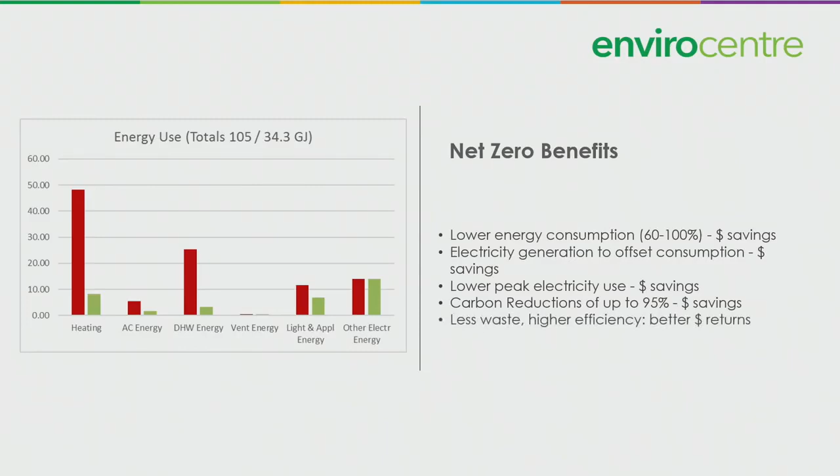Moving on to more net zero energy benefits. So when we have no combustion, we have safer businesses. We have lower insurance—this is something that you can take advantage of. You have better workplace comfort.

Employee satisfaction goes up, and you have marketing advantages, such as those being taken advantage of by some businesses like IKEA or Mountain Equipment Co-op.

Here's a net zero example. It's a retrofit done on a 1980s row house, though you could expect comparable results with many small businesses. The upgrades included replacing a mid-efficiency gas furnace with an air source heat pump and electric furnace. The standard gas water heater was upgraded to a heat pump water heater with drain water heat recovery. Air leakage was reduced significantly, down to 1.5 air changes per hour. Lighting and appliance upgrades were applied, all windows were replaced with triple pane fiberglass, and 500 square feet of solar panels were installed to match the reduced usage.

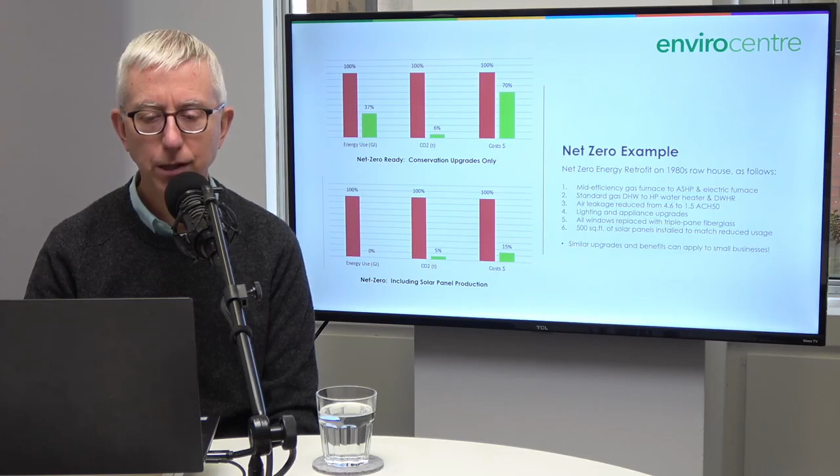Now, when we install the solar panels, what happens? Our energy use has gone down to zero — that's the net zero we've been talking about. Our CO2 has gone down by 1% more, and look at our costs — they've gone down to only 15% of the original. The reason you're paying anything at all is because you have to pay to keep the account open. That's merely your fixed cost, because all the rest of the electricity is being accounted for by the production of your solar panels in the net metering situation.

Note that this particular scenario does not include so-called deep retrofits. The building was not clad with insulation or anything like that, and it has a payback period of less than 10 years. So the economics are there to support going towards net zero.

Now, how are we going to get towards net zero? We'll try to give you some ideas of where to start. First, you're going to lower your heating and cooling demand so you can get away with smaller equipment and lower energy use, less combustion of fossil fuels, and a clean local electricity supply.

We'll look at some ways of getting there. First, the price of deep retrofits. I'm a little skeptical about the approach of using deep retrofits to get to net zero. The reason is that they are costly and there are diminishing returns.

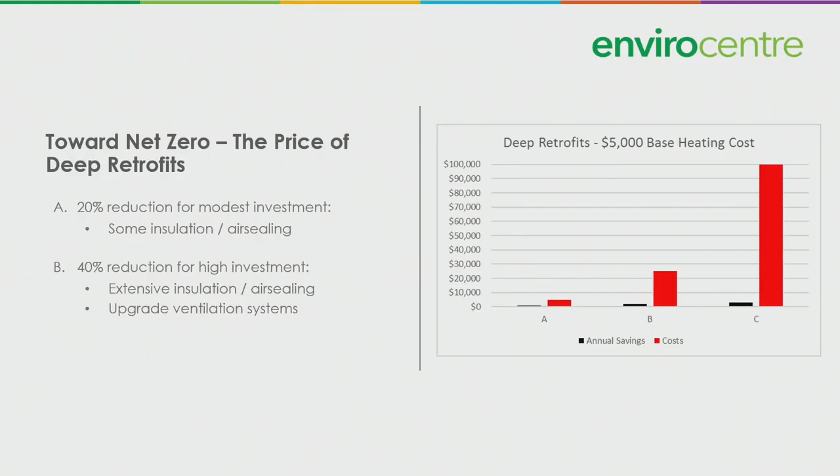In the third scenario, we're getting a 60% reduction, but our investment is very high — it's going to cost us $100,000, which is typically what these kinds of retrofits cost these days. For that, you get full exterior insulation and air barrier, the full foundation insulated to a high level, and all windows and doors upgraded. But you're still only going to get a 60% reduction of your utility bills. So you're spending $100,000 to get $3,000 a year. The economics don't look so good for deep retrofits.

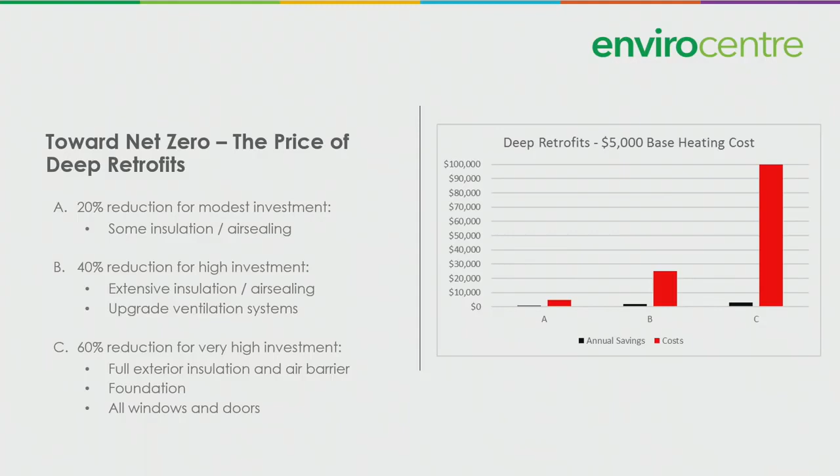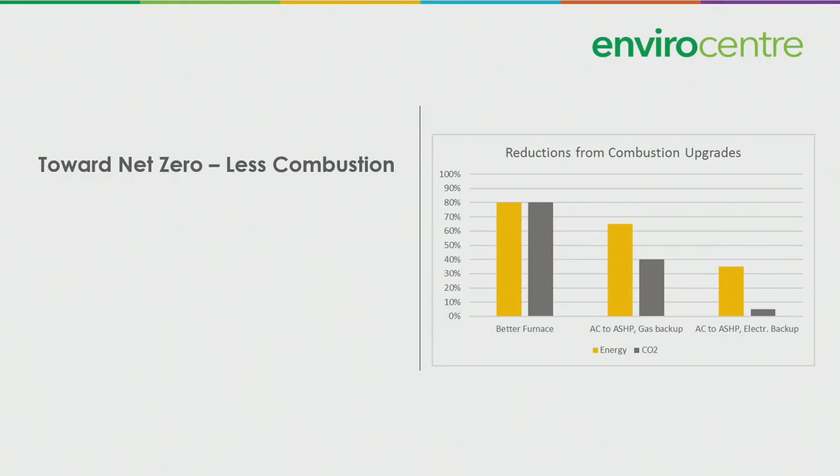What I'd like to encourage instead, as a starting approach anyway, is to aim for less combustion right off the bat. In this table, we're comparing the energy use and carbon production for various upgrades. First, the initial scenario: we took our old furnace and put in a more efficient furnace, and as a result reduced our usage by about 20%, from 100% down to 80%. The incremental cost for that kind of upgrade is fairly small.

However, if we had instead decided to take out our old AC and put in an operational air source heat pump, we would get much deeper gains. So we're cutting our energy use by 45%, and we've got a 60% drop in our CO2 for taking that route.

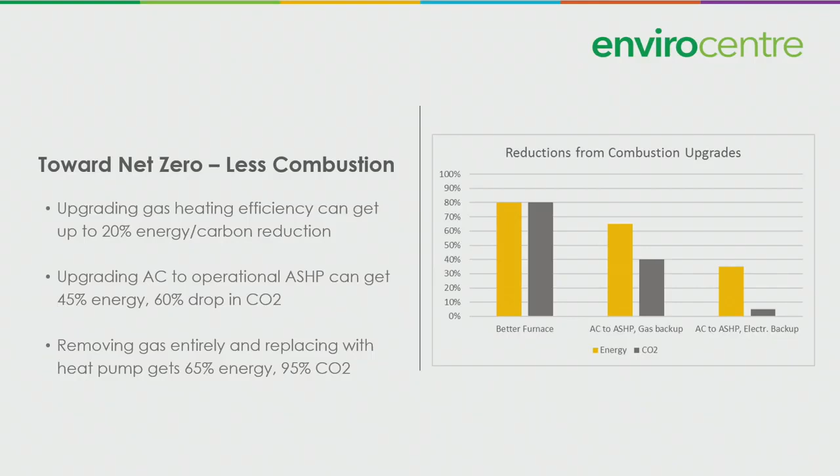Bear in mind that we're still keeping the original furnace in this case, still there as a gas backup. In the third scenario here, we remove the gas entirely and replace it with a heat pump with electric backup, and that gets you a 65% reduction in energy and a 95% reduction in your CO2. So these are much more economical and feasible upgrades than doing the envelope upgrades, which take a lot of planning, time, and materials, and take time to install as well.

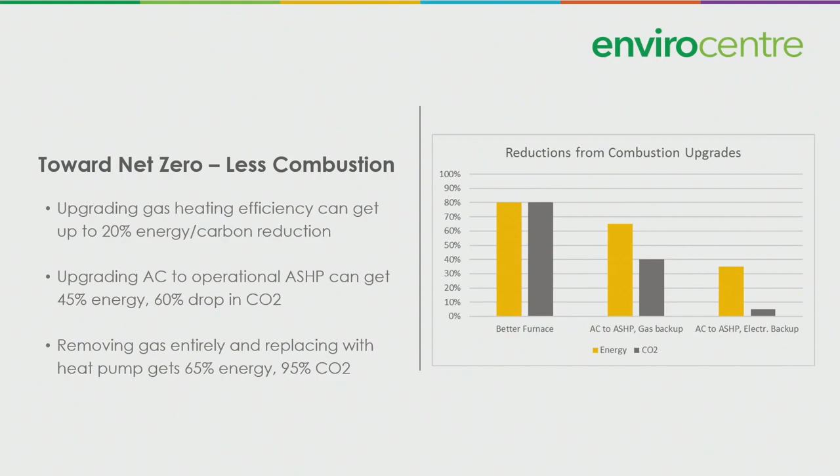Going towards looking at our clean electricity grid. Our current electricity grid here in Ontario is pretty clean. We actually have a pretty low emissions factor now because we've gotten off coal here in Ontario.

The question is, can our grid handle the extra load? If we're going to shift everything off of producing heat directly with natural gas and start producing it with electricity, are we going to be able to handle that?

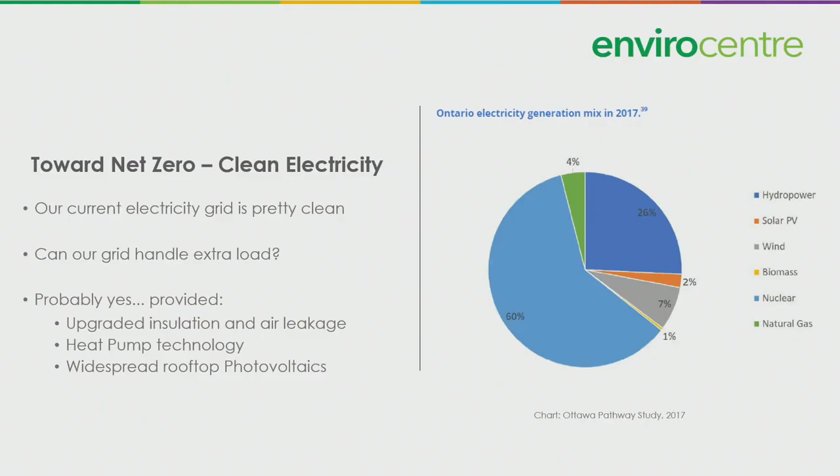Probably yes, I would say, provided that we also upgrade insulation and air leakage in our buildings, adopt heat pump technology, and install photovoltaics on a widespread scale on rooftops. There's a lot of flat roofs out there that have nothing on them but HVAC equipment.

Here's an upgrade awareness activity. What do you think would be the most effective retrofit projects when you consider energy savings, cost savings, and carbon savings? Which of those would deliver the highest percentage? The 5 scenarios are: upgrading all lighting in an office tower to LED, installing a heat pump instead of an air conditioner in a business. Mind you, we're talking about percentages rather than absolute values here, so the size of the business isn't as important.

Installing R60 insulation in an attic that previously only had R30 insulation. Upgrading an uninsulated basement to R10, or installing triple pane windows.

So if we look at these different scenarios, the best one for energy savings turns out to be the heat pump, with the worst being the attic. The reason being that the attic is typically the best insulated part of the building. For example, when you're outside walking around with a thin coat and a warm hat on, you don't put on a warmer hat to be more comfortable. So the lesson there is that it has very little effect insulating the best insulated part of the house.

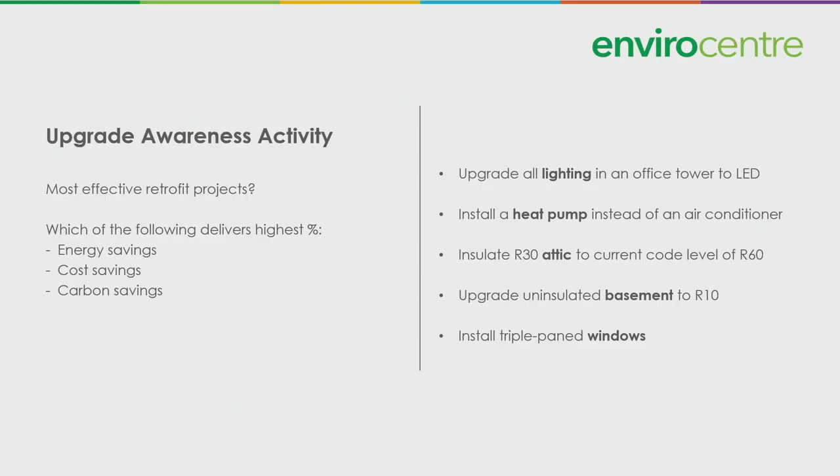Now, if we look at carbon, the best is again the air source heat pump, and the worst is lighting. The reason being that inefficient lighting produces lots of heat. When you replace it with efficient lighting, you now have to turn up your heating equipment to make up for the difference, and if your heating equipment is fired with natural gas, then your carbon is going to go up.

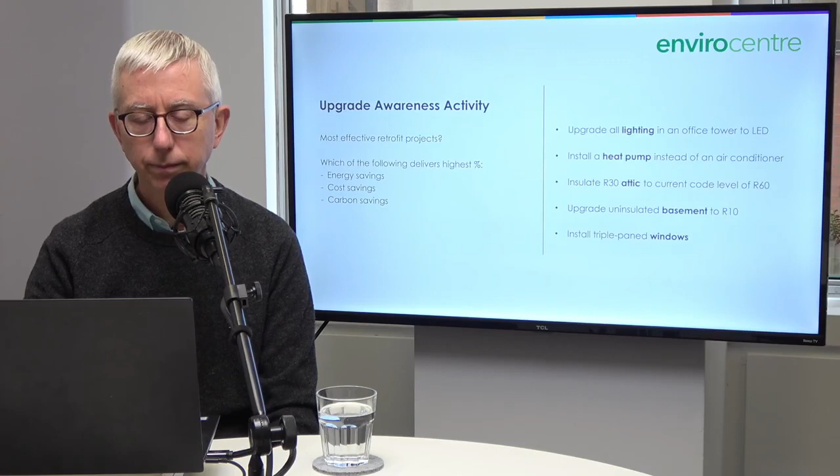So first of all, you would want to find out where you are and use benchmarking. It's more than just dollars - this is bookkeeping that allows you to make decisions based on the whole consumption picture.

It's do it yourself, or help is available through Energy Star Portfolio Manager, which is a free online tool. You can also join Carbon 613 - we would certainly help you establish your baseline and targets, or you can have an energy audit.

If you're going to have an energy audit, you'll need to find an evaluator. For an office, retail, restaurant, or workshop situation, you would look for an energy auditor or an energy manager. Typically, they would be coming from a consulting engineer or a utility company, or some place like that that specializes in that kind of activity.

For rental properties, you could use a registered energy advisor if the building was reasonably small. It would need to be Part 9 building code, which means less than 600 meters squared footprint and 3 stories or less.

If you rent, lease, or share your building, you can influence your workplace. You can have a green team. You can reduce your energy use through behavior. You can do some small upgrades that have big impact. And you can still join Carbon 613 for ongoing support.

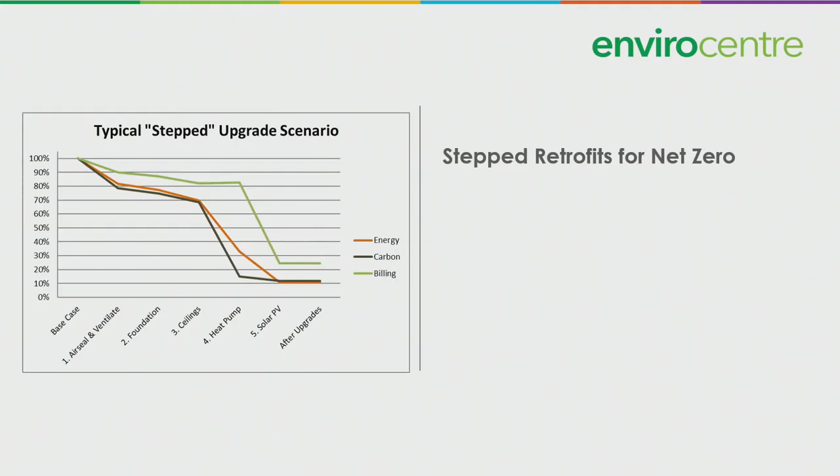Let's look at stepped retrofits for net zero. These stepped plans start with the most cost-effective upgrades and use savings to pay for other upgrades, and typically it's building envelope upgrades first. This is a particular scenario that was performed on a building downtown in Ottawa that's a heritage building, so the upgrade scenarios are somewhat limited by what you can do to the exterior of the building.

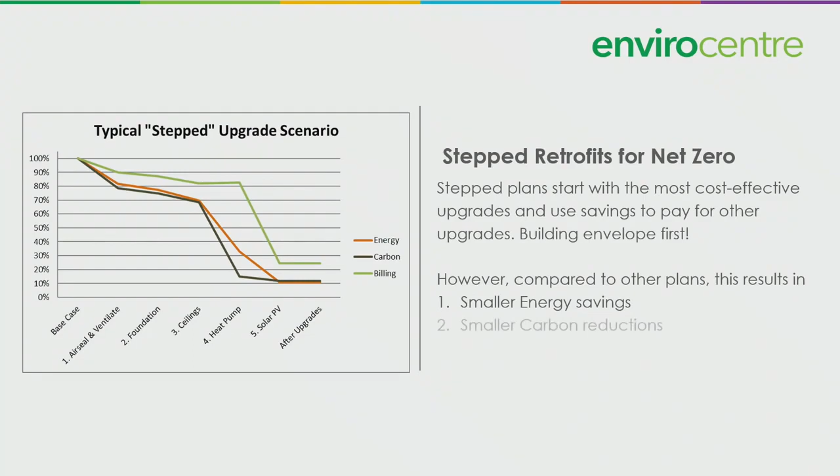However, when you compare the stepped retrofit scenario to other plans, this results in smaller energy savings, smaller carbon reductions, and smaller dollar savings. So I don't recommend it.

What I would recommend instead are more effective strategies for net zero, including this high impact greenhouse gas upgrade scenario. With that scenario, we cut to the chase. We start with upgrades that have immediate significant impact on energy use, like air source heat pumps and solar photovoltaic cells.

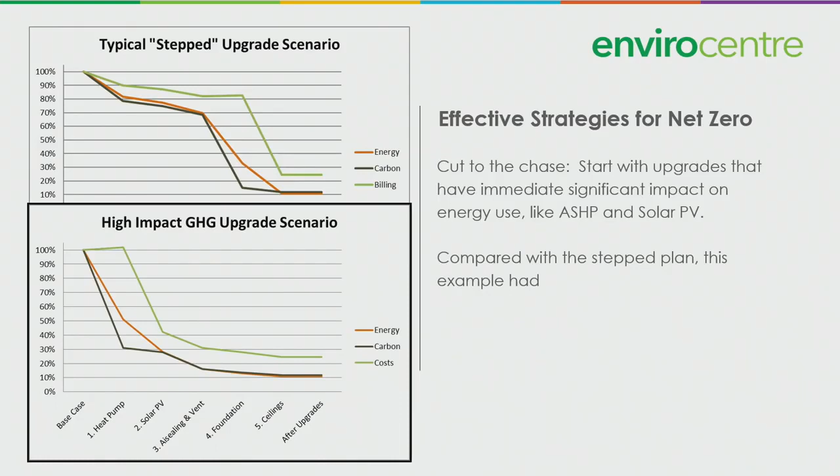Compared with the step plan over a period of 5 years, this example had 56% less energy use, which amounted to 740 gigajoules, 60% less carbon production, 33 tons, and 38% lower utility costs, which amounted to almost 10 grand in extra cash. So obviously it's a better route, especially when you consider that both of these upgrades cost exactly the same amount. The capital costs were the same.

You can kind of see, if you look at the two charts, why that is the case. The step scenario has a kind of belly that sticks up, and the amount of savings are represented by the amount of area that's underneath the curve. So the smaller the area there is, the greater your savings are going to be. And that's the case for every one of these curves with this kind of scenario.

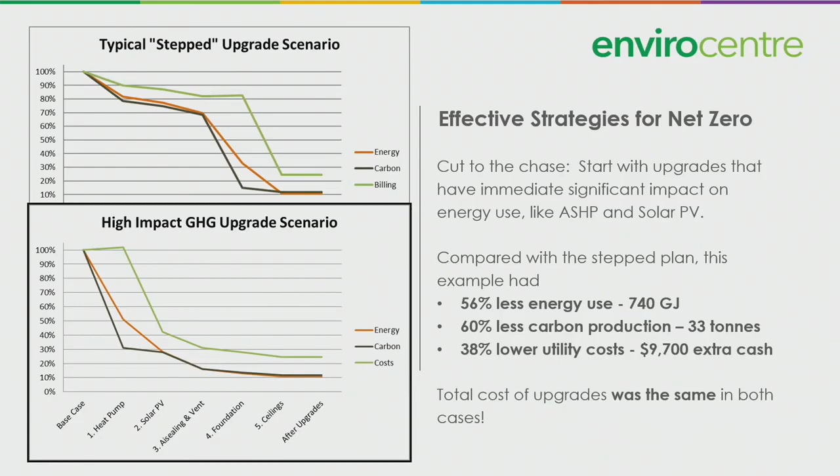So, high impact strategies: first of all, they require energy analysis. You need to get an energy advisor in earlier to get the projected sizing of equipment and the solar photovoltaic cells. You have to arrange financing to support the upgrades because you're going to have more upfront costs.

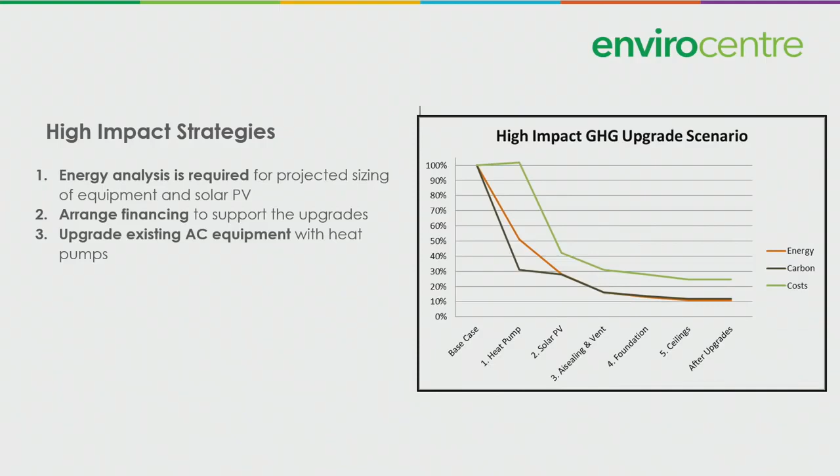Upgrade the existing AC equipment with heat pumps. That's what I would recommend starting with. Keep the existing heating as backup for now. You don't need to replace your furnace or your boiler yet. Install your solar panels.

Then perform your viable envelope upgrades in the most cost-effective order. Deep envelope upgrades may not be necessary to hit the target. If you look at the chart on the right, we reached 90% reduction of carbon and energy use.

And upgrade your ventilation systems with heat recovery. What happens when you're tightening up these buildings is they become more airtight, so it becomes more crucial to provide effective ventilation.

Finally, when you've done all the other upgrades and your combustion equipment is reaching the end of its life, retire your combustion equipment and replace it with something that produces heat through electricity.

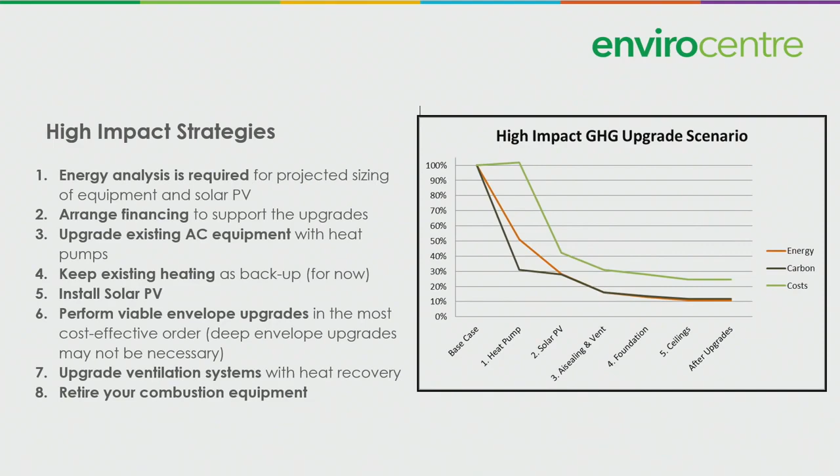So a little bit more about incentives here. Incentives cut your costs. We have the Hydro Ottawa IESO Save on Energy retrofit program, which offers substantial incentives for electrical savings and also certified energy manager training. We have Enbridge that offers Smart Savings, which is similar, and they also have some home efficiency rebates that we'll talk about.

So first of all, the Save on Energy program: don't start your upgrades until you submit the application. They won't accept it if you're kind of in midstream. You need to get in there before you start doing anything.

There's a prescriptive track for lighting upgrades, etc., so you get an incentive in dollars per unit of product, but you require an application and documentation. There's also a custom track for everything else that can't be done under a prescriptive track, so there you get paid an incentive per unit of demand or consumption, depending on your situation. That custom track will cover up to 50% of your project costs, which is potentially a very hefty rebate.

The application includes your info to estimate energy savings. It can also be submitted by a third party like Envirocentre.

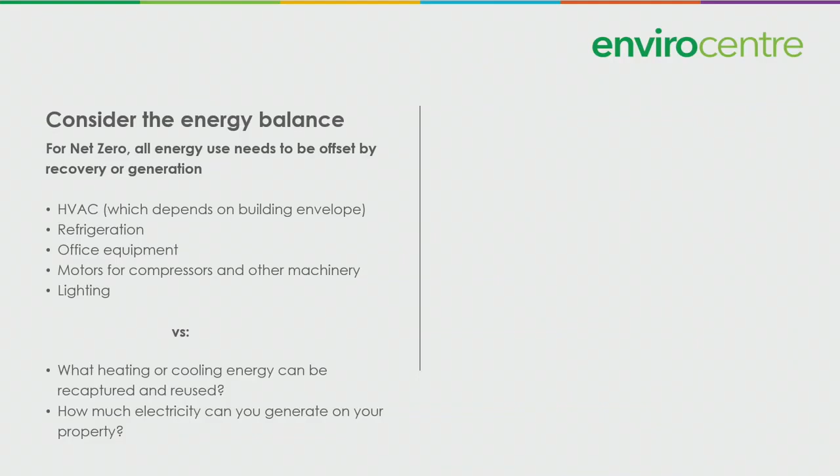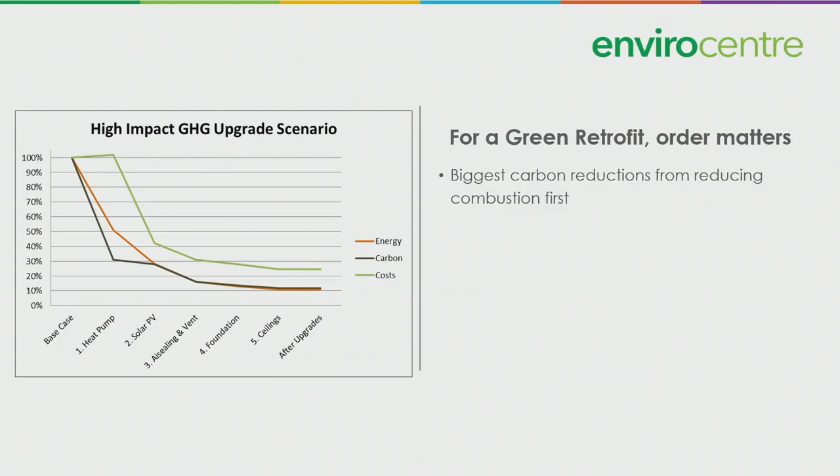For a green retrofit, order matters. Target the biggest carbon reductions first. Start by replacing your older central AC with heat pumps. The incremental cost is small and operating costs will be similar. Solar PV next, then do the cost-effective upgrades.

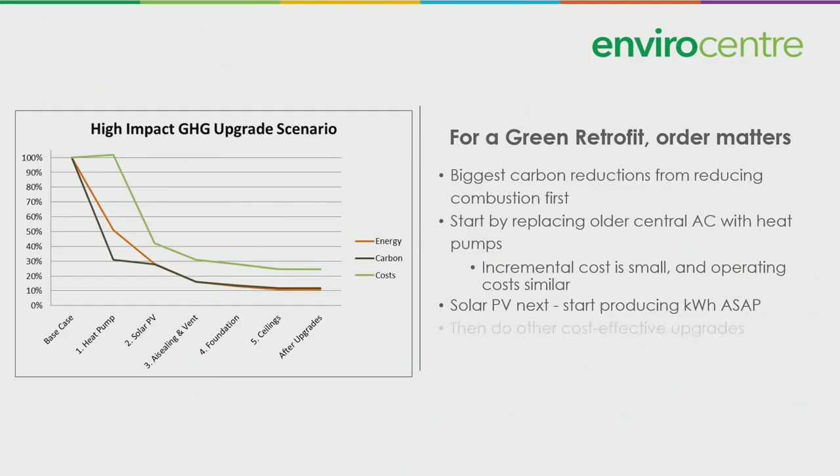So now we're going to talk about some of the upgrades. Some of this we've covered in part 1, so I'm just going to breeze through it here. The easy energy efficiency upgrades would include things that would reduce your heating bill by about 10%, such as poorly insulated attics, uncontrolled air leakage, idling or redundant equipment, exhaust fans with no heat recovery, older equipment that produces heat or cold. Deeper energy efficiency upgrades include poorly insulated walls.

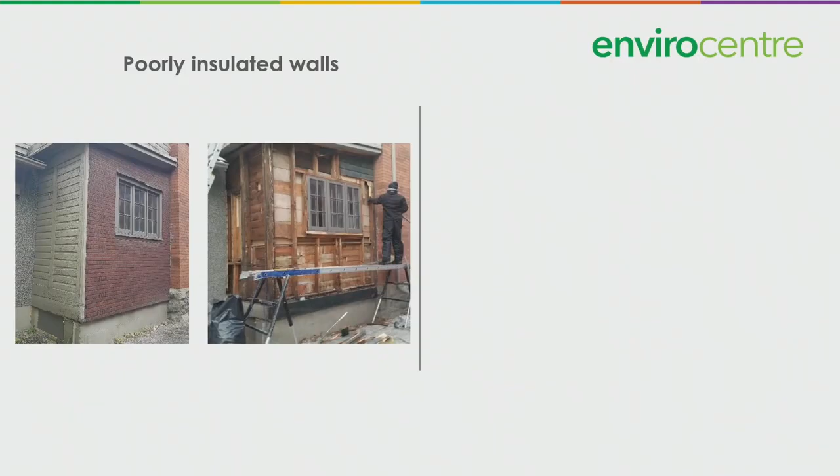If there are empty wall cavities, typically they're not opened up like the one in the picture here. They can drill small holes and implement a speedy, inexpensive upgrade that can save up to 20% on your heating bill. Cellulose is packed into the walls, and it also reduces your air leakage, so you get a lot of bang for your buck.

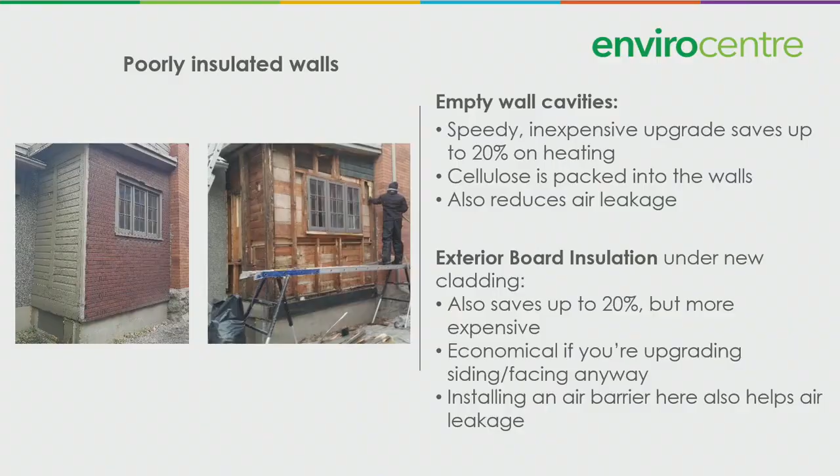You can also apply exterior board insulation under new cladding. If you were intending to put in new cladding, this would be a good approach to take. You could save up to 20% depending on the situation if you're starting with uninsulated walls. But it is more expensive to put in this board insulation. It can be economical if you're upgrading the siding or facing anyway, then it becomes more of an incremental cost. Installing an air barrier here also helps reduce your air leakage, so that can be a good approach.

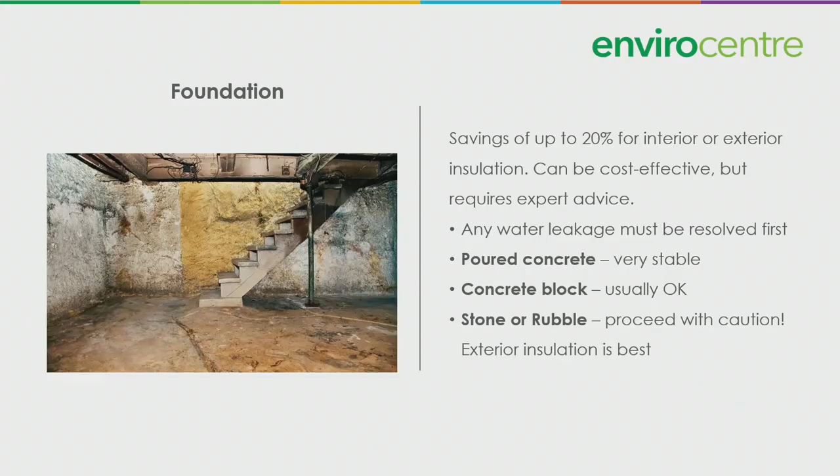On the foundation, we have savings of up to 20% for interior or exterior insulation, which can be cost effective, but it requires expert advice. The reason being, any water leakage must be resolved first. In fact, water is usually the prime concern here in some way. If you have a poured concrete foundation, it's very stable and you can insulate it from the inside, usually without too much concern if there are no water issues. If you have concrete block, it's also usually okay. But if you have stone or rubble, you have to proceed with caution. The exterior insulation is best. So get expert advice for foundations.

For windows, it's not usually cost effective for energy to install windows. You get less than 10% savings, but you get increased property values. They also help control sound and comfort. If you're going to install them, install the best you can afford, which would be fiberglass triple pane with long warranty. By the way, triple pane are becoming just run-of-the-mill windows these days. You can also install awnings, blinds, or even storm windows that offer effective comfort improvements. Window treatments, that is, window films and so on, can be applied to glass to help address summer overheating. So there's a lot of ways you can upgrade windows to improve your energy situation.

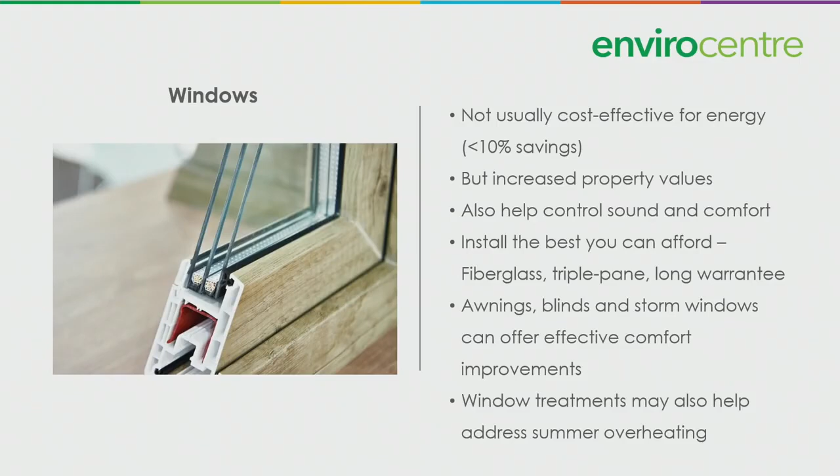Solar energy has big capital costs but high returns. You will need to get a site assessment, but your roof could be suitable for photovoltaics, where you're producing electricity. You have long-lived equipment with very little maintenance. Net metering can offset your entire electricity usage each year, depending on the sizing of your equipment and your loads. They are a necessary component of net zero. Obviously, you've got to have generation to offset your use, unless your use happens to be zero to begin with. The install costs are typically about $3 per watt, so for a 2,000 square foot array, it would cost you about $15,000.

There's also solar thermal. About 15 years ago, these were strongly advocated for water heating, but that has ended up being perhaps not the best approach for Canadian climate. They're still useful for some commercial situations, for example water heating in summer, or air preheating for winter ventilation. This product, SolarWall, has been used in a lot of warehouse and barn type situations to help preheat the air before bringing it into the building.

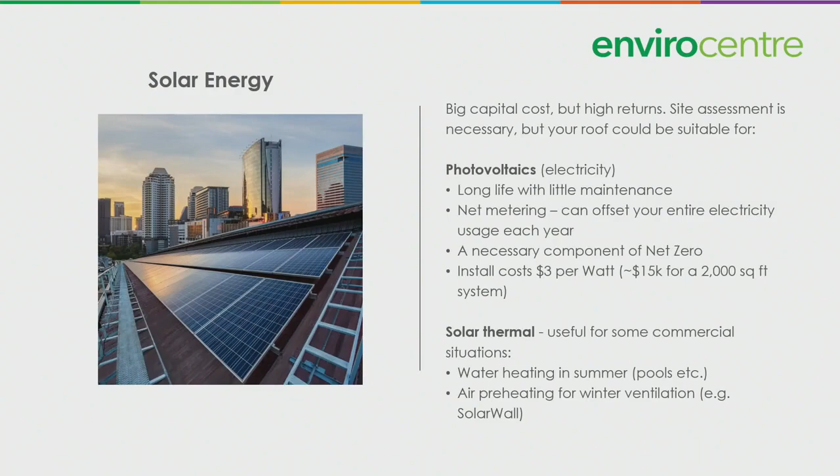HVAC, all heating and cooling. Make sure your equipment is working properly.

If it isn't working properly, be careful about upgrading it without considering your energy plan. At this point, I would strongly encourage nursing your older equipment along rather than upgrading it to the same kind of equipment. On the issue of heat distribution, evaluate what you've got and add zone controls if necessary.

With your thermostat or your building automation system, you should set occupied settings of about 20 degrees during winter or 25 in the summer for good energy efficiency. When it's unoccupied, set them back. On the weekends, you can set them back to 17°C in the winter or 20, or set them forward to 28°C in the summer. More energy savings.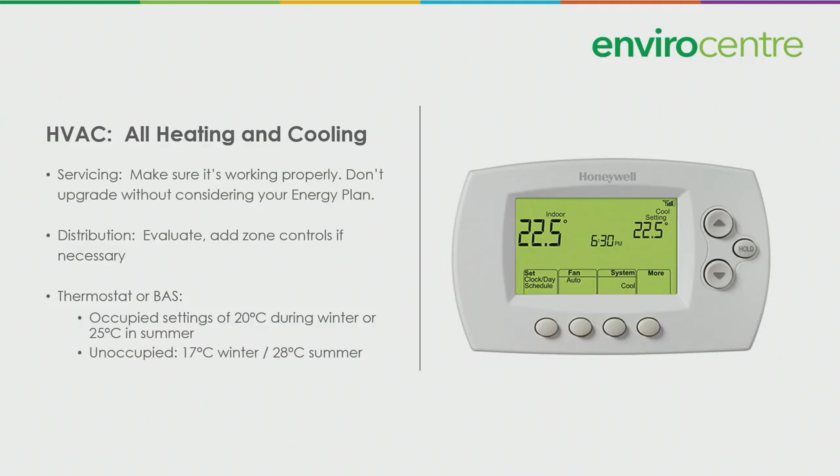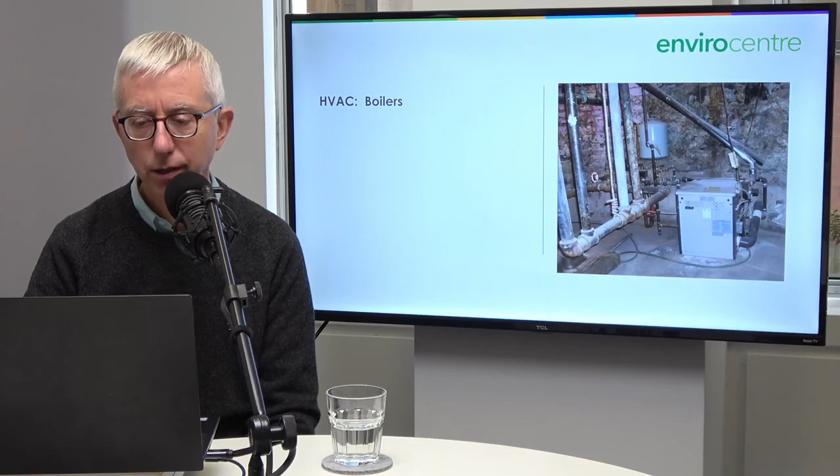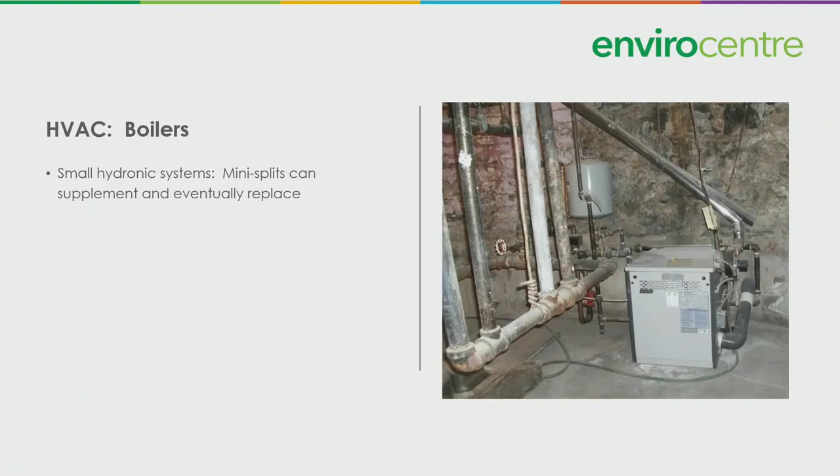If you've got a boiler system, here's a boiler system for an older building. It's about 200,000 BTU. If you have a small hydronic system, and I'd suggest this is in that category, you can add mini split air source heat pumps to supplement and eventually replace your boiler system. With multiple indoor heads, mini splits can provide better comfort control.

If you have a large hydronic system, you can service it for best performance. You can perform energy upgrades to existing equipment, which would result in 10 to 30% savings, but don't upgrade without consulting your long-term energy plan. You want to avoid lock-in.

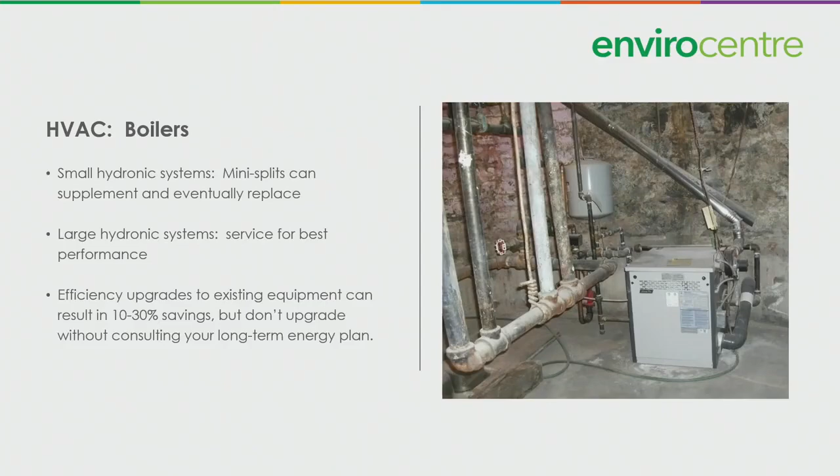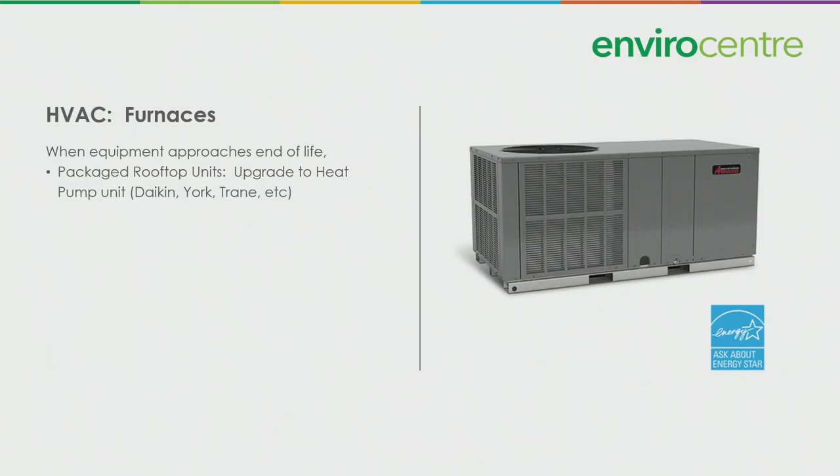For furnaces, this is a rooftop unit here. When your equipment approaches the end of life, you can upgrade to heat pumps on your roof. This is actually an Amana heat pump system that's meant as a rooftop unit. So they are available.

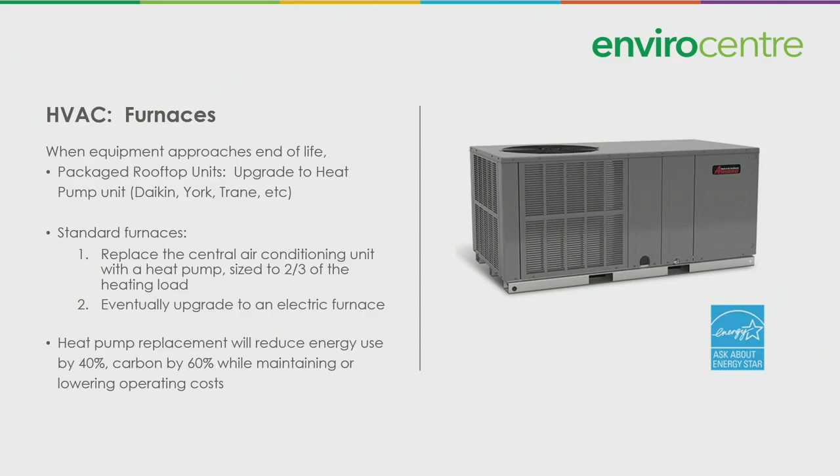If you have a standard furnace, you can replace your central air conditioning unit with a heat pump sized to about two-thirds of the heating load and eventually upgrade to an electric furnace. When you do upgrade to your electric furnace, you can close the gas account and capture those fixed costs as savings. Heat pump replacement will typically reduce your energy use by about 40% and your carbon use by about 60%, while maintaining or lowering your operating costs. So it's a pretty good investment.

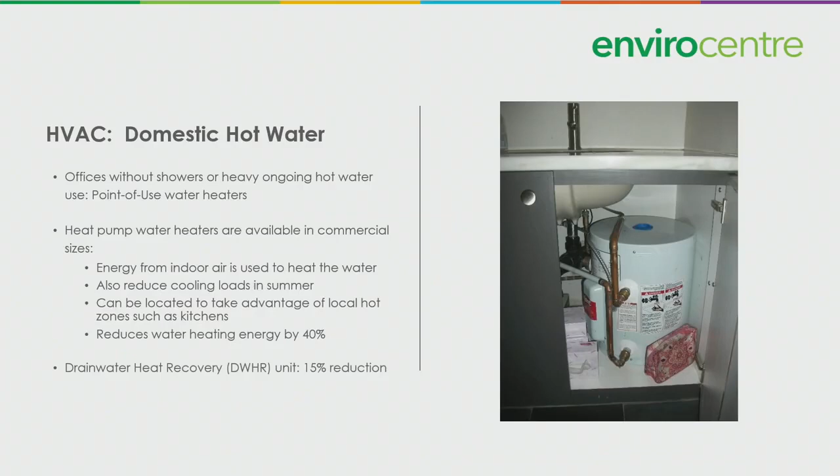If you do have showers, you'd want to think about installing heat pump water heaters. They are available now in commercial sizes. They take energy from the indoor air and use that to heat the water. They can also reduce your cooling loads in summer because they're cooling the air inside. They can be located to take advantage of local hot zones such as kitchens, and they will reduce your water heating energy by 40%. You can also add drain water heat recovery units for about a 15% reduction.

Looking at ventilation now, all your fan motors should be ECM, energy efficient motors. Adding heat recovery to your exhaust will recapture about 50 to 75% of the heat.

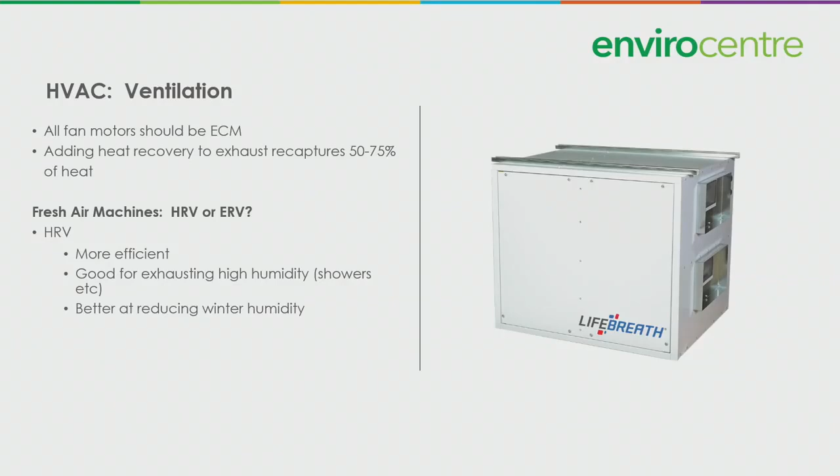Let's talk about these fresh air machines. Some people call them fresh air machines because that's what they're doing. HRV and ERV seem to be terms that not everyone understands. HRVs, compared to ERVs, are more efficient. They're good for exhausting high humidity zones like places with showers, or maybe a lot of boiling water and steam. They're better at reducing winter humidity. So if that's what you want to do, that's maybe the direction you should go.

If you have an ERV, it's better at maintaining humidity levels. It's better if you're in an air conditioning situation, since you won't be bringing in a lot of humid air, and it will reduce some of the humidity. There's no drain required from a technical perspective. An HRV has to have a drain to drain off that condensed water. ERVs generally do not need a drain. The unit in the picture is a commercial unit, a commercial HRV unit.

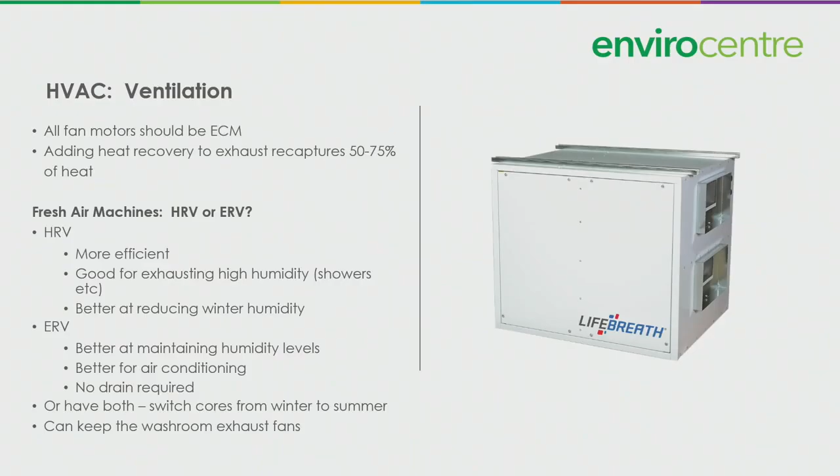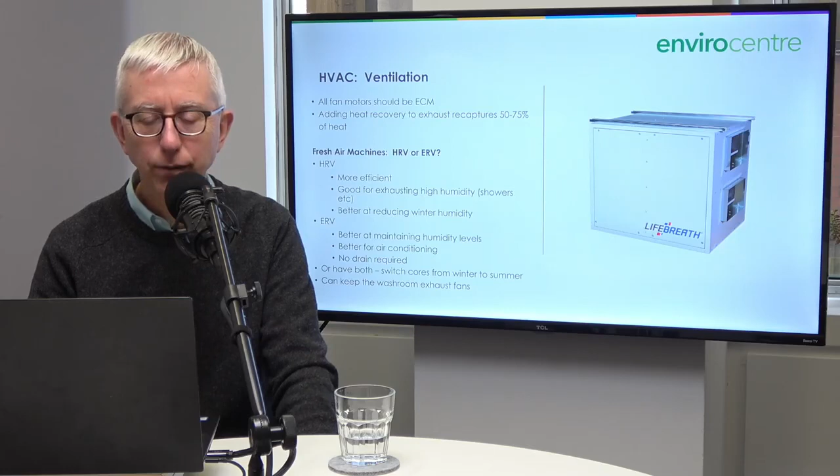You can also have both. You can buy an extra core for your HRV and switch it out from winter to summer so you can have the best of both worlds. By the way, you can keep your washroom exhaust fans in these situations, or replace them depending on what you want to do with your system. It's generally more efficient in a commercial situation to replace the washroom exhaust fans with an HRV or ERV that's running continually.

Air conditioning: if you have a mini split AC, and a lot of restaurants are buying these, make sure the unit is also a heat pump and get it slightly oversized. Size the unit to about 2/3 of your heating load. Multiple indoor heads will ensure good local climate control. If you have central AC, replace the unit with a multi-stage heat pump sized again to 2/3 of the heating load. With conservation and upgrades, these units can eventually supply all your heating and cooling.

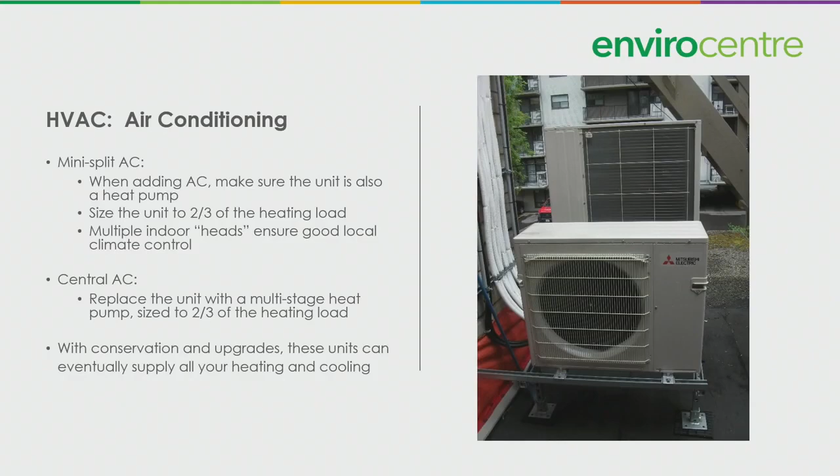Looking at other aspects of smaller businesses, often you have refrigeration. The top upgrades are to replace your open vertical display with a reach-in with glass or acrylic doors, reduce or eliminate anti-sweat controls, add night covers for open horizontal cases, and upgrade to high-efficiency compressors.

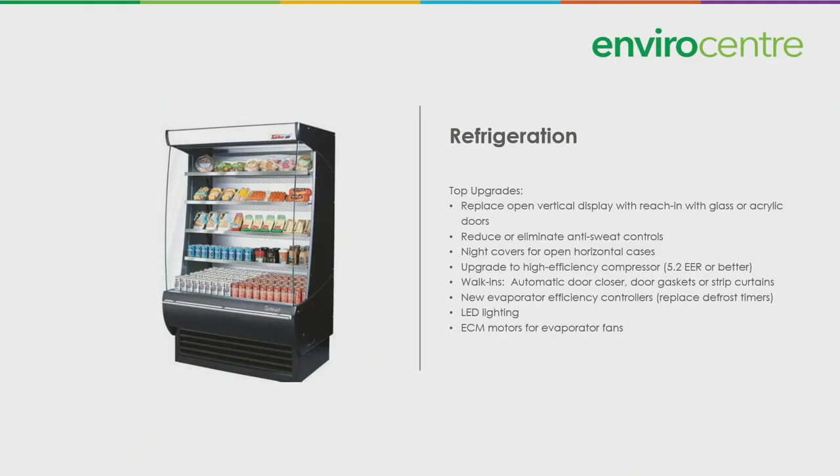If you have walk-ins, you can put in an automatic door closer, door gaskets, or strip curtains, new evaporator efficiency controllers, LED lighting, and ECM motors for your evaporator fans. A lot of these things are actually eligible for rebates under the IESO program.

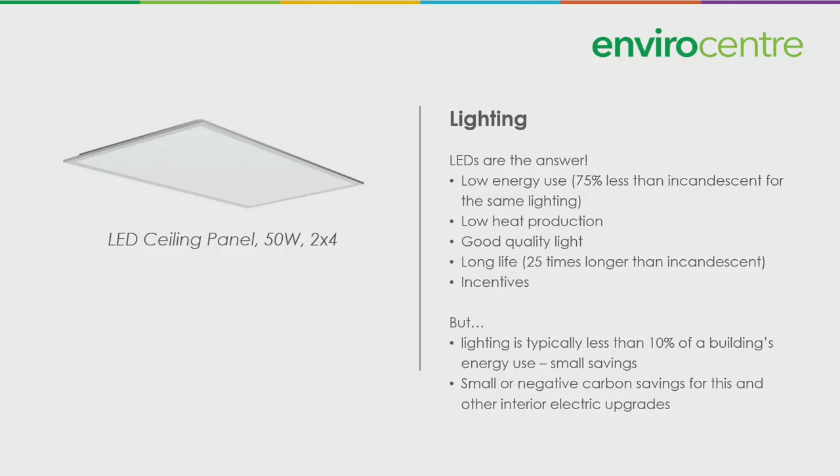Lighting: in the lighting world, LEDs are the answer. Low energy use, good quality light, long life, and incentives. But keep in mind it's typically less than 10% of the building's energy use, so there are small energy savings, and you have small or negative carbon savings for this and other interior electric upgrades because you're shifting the heating load onto your gas systems, perhaps.

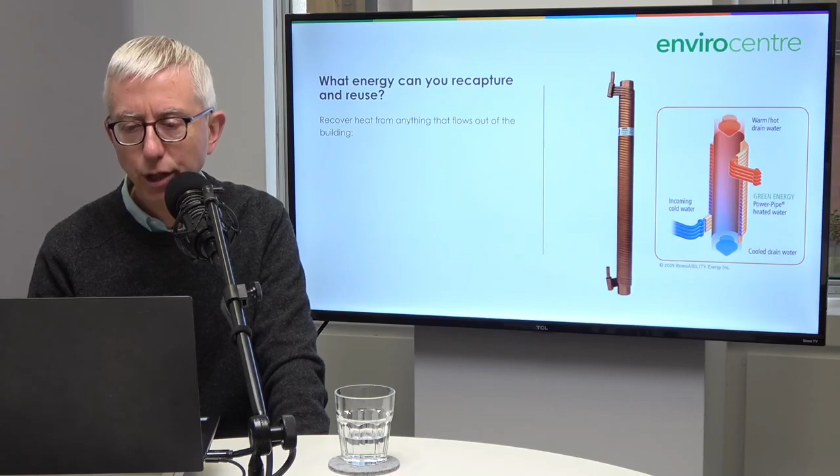What energy can you recapture and reuse? You can recover heat from anything that flows out of the building - in this case, a drain water heat recovery unit. You can use HRVs or ERVs, as already discussed, or drain water heat recovery. You can also, if you have clothes dryers, capture energy from the clothes dryer exhaust.

Now we have heat pump clothes dryers that recover all the heat from your exhaust - you don't have to vent them outside. So you can use clothes dryers to heat your house. You also have the heat pump water heater. Those are packaged systems that have the energy recapture built into them.

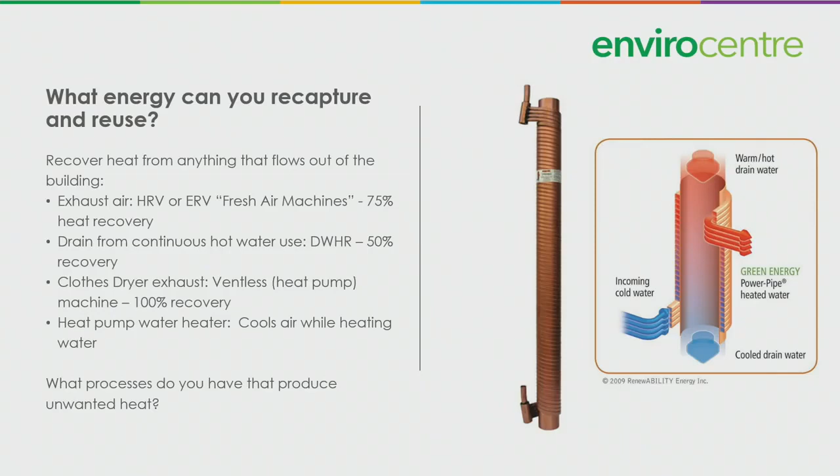But what processes do you have in your business that produce unwanted heat? Think about how you might be able to transfer that unwanted heat to areas where heat is needed.

Here's some examples of energy collaboration. There's district heating and cooling. Here in Ottawa we have some quite sizable district heating systems, like the Cliff Street plant that serves Parliament Hill and a host of other properties along the Ottawa River. The advantage of these is not that they are inherently efficient, but that the shared central system can be configured for maximum efficiency. They're actually in the process of upgrading the system here in Ottawa.

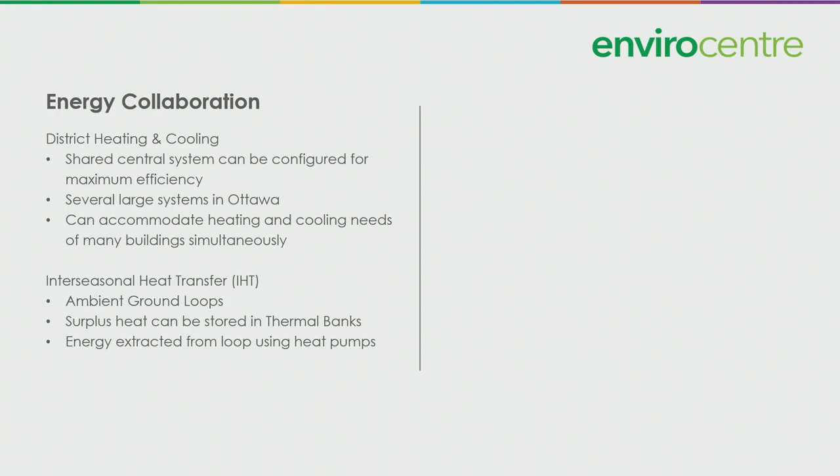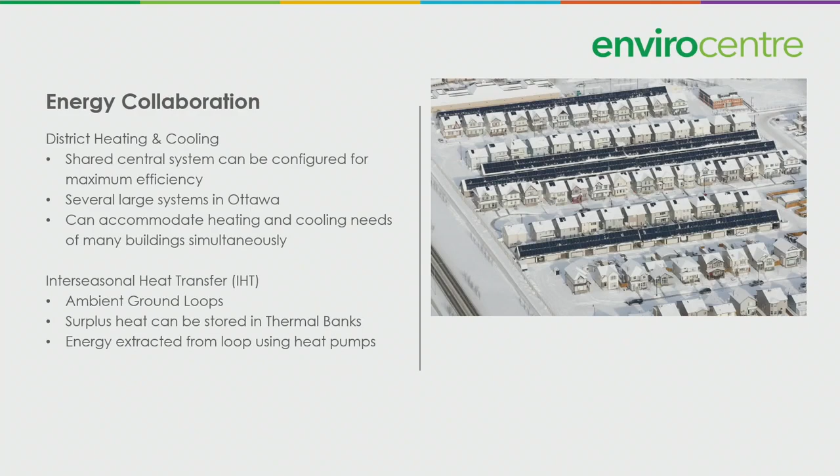You also have interseasonal heat transfer. This has now been going on for quite a while - here's a picture of a system installed in Okotoks, Alberta. What they do is store the heat in the ground and then extract it: in the summer, you store the heat deep underground, and in the winter, you take that heat back out. So it's stored for very long periods of time, and they are incredibly efficient.

I don't know if you can see the number there for the COP, but it says 30. So they are not 300% efficient - they are 3,000% efficient. You get a lot of energy out of them compared to the amount of energy you put into them. So they're incredibly efficient.

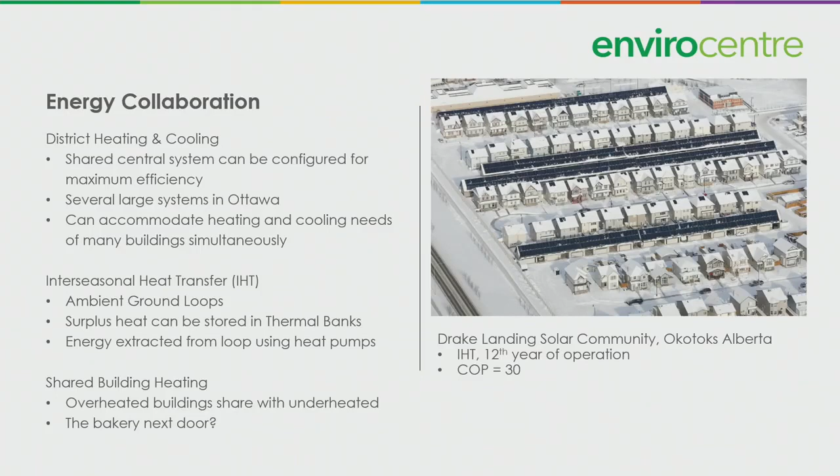We also have shared building heating - some overheated buildings share with underheated buildings. For example, maybe the bakery next door - see what they're doing with their excess heat and see if maybe you can get some of that. By the way, this Drake Landing solar community has been running for over 12 years now, so it's quite a successful project.

So how much electricity can you generate? If you've got a rooftop, south sloping is best, but an east and west combo could also be okay. Flat roofs are great - optimal angles are possible on flat roofs. This is actually a picture of a commercial installation here in Ottawa on a flat roof. There's snow and dirt to be cleaned off, and if they're roof mounted, they're a bit harder to clean - that's one of the disadvantages of rooftop units.

If they're ground mount, they are more expensive due to piling and other requirements, but they produce more electricity and are easier to maintain because of snow - you can get the snow and dirt off them more easily. And their system capacity is not limited by your roof size, so there are advantages to going that route. You have to think about whether there's any area on your property that might be suitable for solar panels.

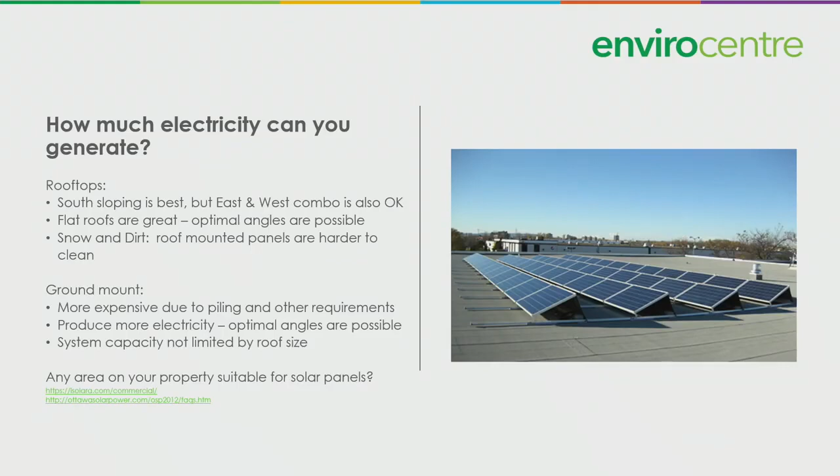When you've decided what you're going to do, you're going to need to find the right contractors. There's some advice from the CHBA: know what you want, have a realistic budget, plan for the long term, protect yourself with a written agreement, don't compromise on quality, don't choose contractors on price alone, and beware of direct sales.

Clear instructions and ongoing inspections are necessary with some contractors. Consider changes of plan based on contractor advice, because they often know what they're talking about. But first, verify with your energy manager.

Consider hiring a concierge service to oversee upgrades, so you have someone there with some expertise who oversees the project to make sure everything's being done according to spec.

Get a permit if you need one. You may have expertise in-house at your business, but don't overextend yourself. Plumbing, electrical, and gas work all require licensed contractors, and there are health and safety concerns in some situations.

Now to look at some of the green tools and certifications. In terms of energy tools, Natural Resources Canada offers data analysis software and modeling tools. There's HOT 2000, which is kind of the Canadian standard for residential energy modeling, available for free download.

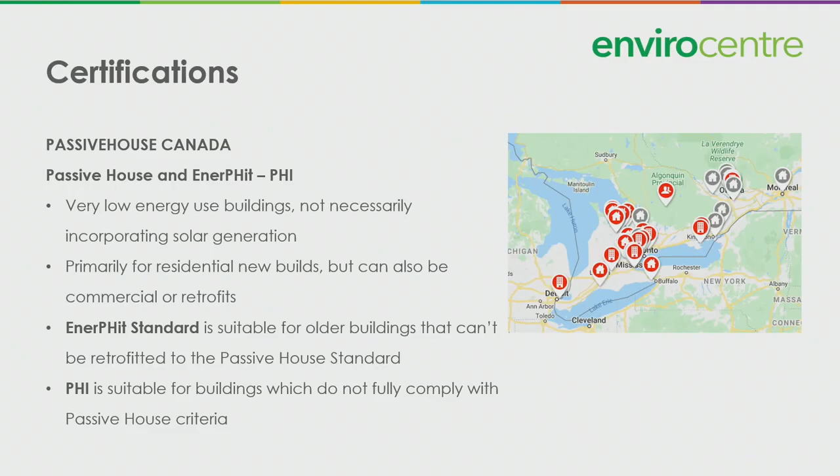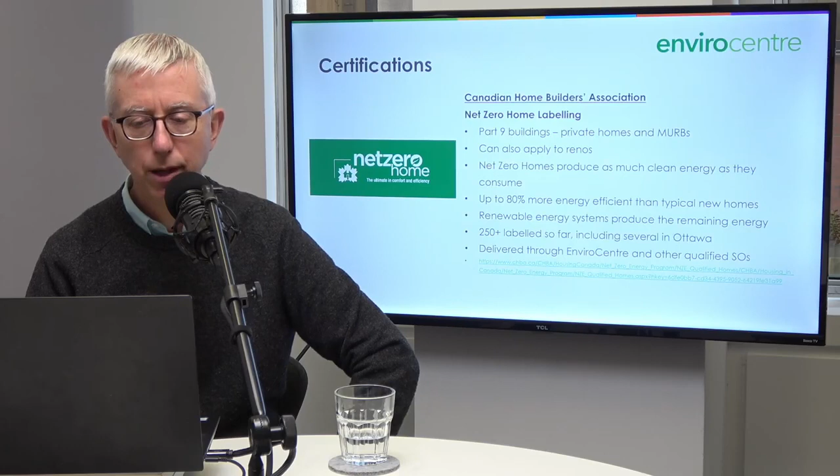This is worth having a look at for smaller buildings, smaller residential buildings at this point: it's the Net Zero Home Labeling Program delivered by the CHBA. It applies to private homes and MURBs, and can also apply to renos. There have been more than 250 of these labeled so far, including several in Ottawa, delivered through EnviroCentre and other qualified service organizations. Talk to us if you want to know more about that program, or visit the CHBA website.

So enjoy the outcome of your upgrades. You end up with a better building that has better comfort, lower costs, more resilience, less affected by weather, and better health—your air quality should be improved. You have a better business: your business reputation is enhanced, you have better customer and employee retention, and your operational knowledge and planning are better.

And this all adds up to a better city. You are taking action on climate. It adds up to better public health, resilience, a green economy, and the dollars stay in town, since all of these upgrades are done locally.

Here we have a deep retrofit video for you to watch, that was done by Efficiency Nova Scotia.

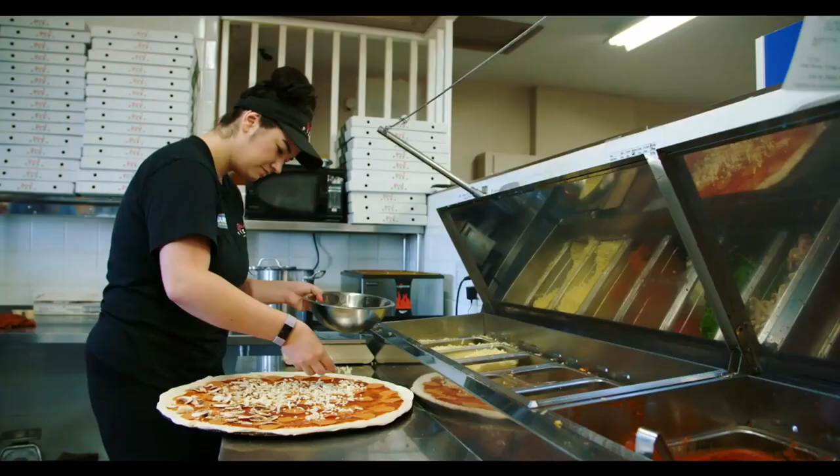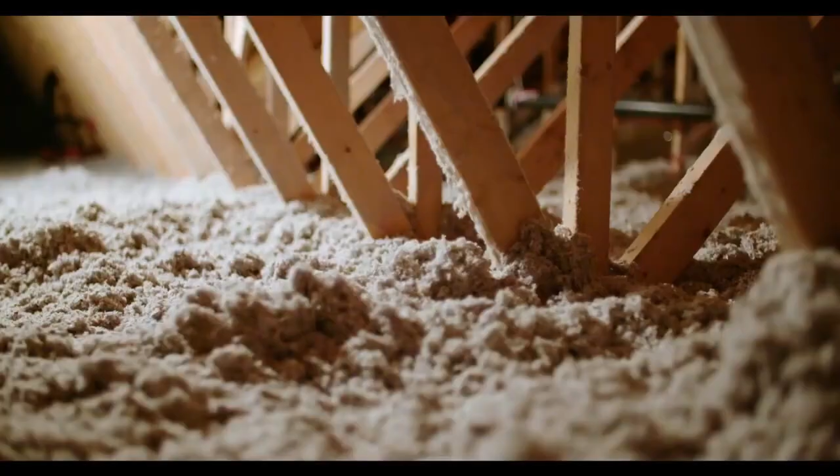The first thing we did was the insulation. In the wintertime, even though the machines were putting off a lot of heat, all the heat would just rise and leave the store.

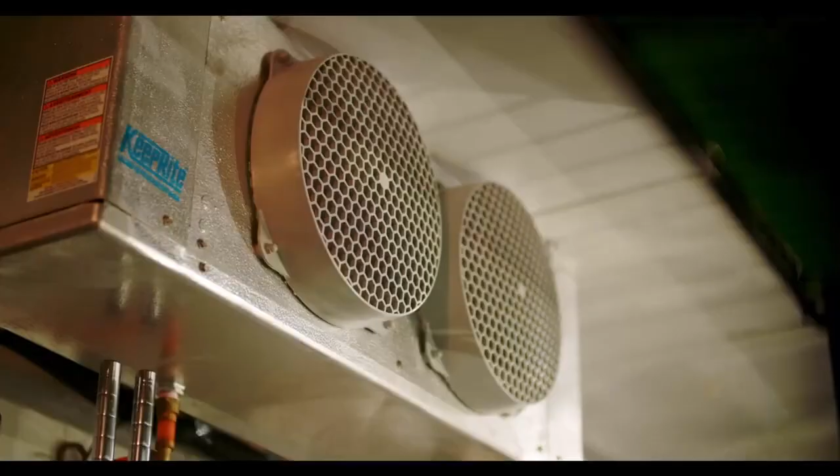We also looked into heat pumps, which helped to cool down the store in the summertime, especially with the pizza restaurant inside. The heat was unbearable when you walked in here for customers and employees. We looked into getting a walk-in fridge and freezer. It definitely helped out big time with the heat, the noise, and people know everything cool is in that one area.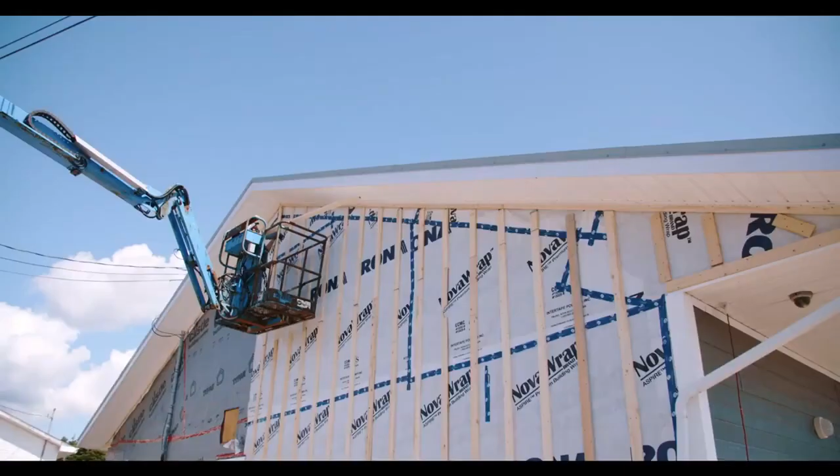It's crazy the difference. We've changed it so much in the 3 years that we've owned it. Since all the upgrades have been done, it's not as warm and humid, and people come in, sit down, relax, get out of the sun. The power bill itself is on average around $1,000 lower a month. And all the money that we've been saving has been going into the outside of the building.

Dealing with efficiency throughout the whole process was very simple, easy, which is awesome, especially for small businesses that do need the help. I would definitely recommend it.

Carrying on here, I wanted you to have a look at some of the fantastic work that's been done here in Ottawa along these lines. There is Karen's Place, Salus Clementine, which is located near Billings Bridge. It's a certified passive house building, completed in 2017. It's 42 bachelor units, 22,400 square feet. The heating costs are only $1,134 annually. Yes, you heard that correctly. For a building of this size, that is nothing short of remarkable.

It is LEED Canada Platinum rated, and they kept track of the upgrade cost premiums, and they only amounted to about 10%. So the incremental cost was only 10%. It only cost 10% more to build this building that uses probably about a tenth of what a normal building that size would use.

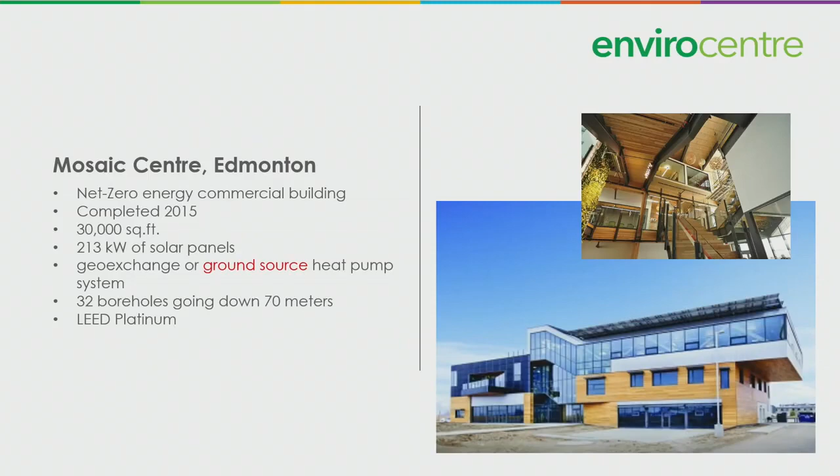Here's the Mosaic Center in Edmonton. It's a net zero energy commercial building. This and the previous building were built from scratch. It was completed in 2015. It has a ground source heat pump system, or a geo-exchange system, which is 32 boreholes going down 70 meters, located under the parking lot. It's also rated LEED Platinum and has 213 kilowatts of solar panels on the roof.

And here's one that we also have a video of that we'll show you at the end, the Wilkinson Avenue warehouse in Dartmouth, Nova Scotia. I include this because it represents a scenario that could be applied in a retrofit situation to warehouses, for example. It's a 65,000 square foot warehouse, insulated with R20 walls and an R40 roof. They also upgraded the slab, which might not be as feasible for an existing structure, but they only use 6 air-to-water heat pumps for radiant heating of this building. It does have backup condensing gas boilers, but it is a zero-carbon warehouse nevertheless. They have a net-metered solar PV system on the roof as well.

And I have a video here for you to watch.

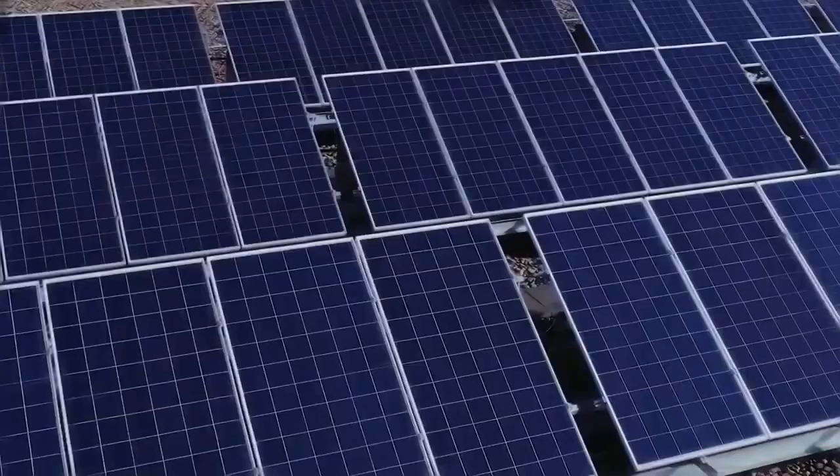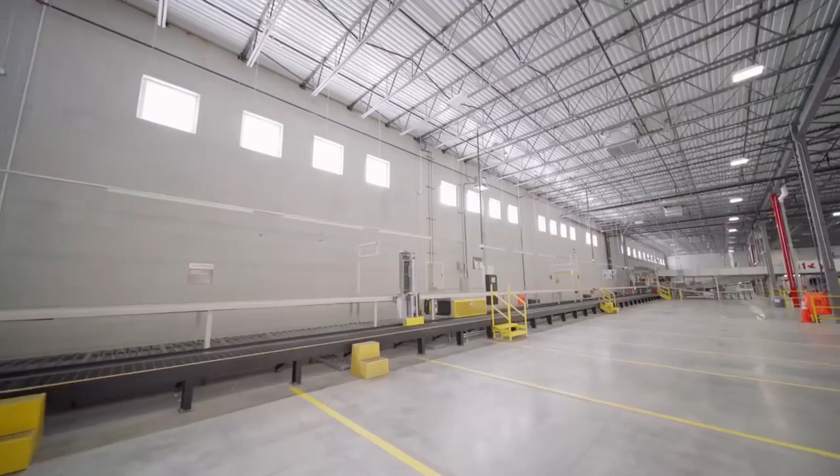Under the Paris Agreement, Canada committed to lowering emissions by 30% below 2005 levels by 2030. With 17% of emissions generated from the built environment, creating low-carbon buildings is of critical importance to meeting these international targets. The Canada Green Building Council created the Zero Carbon Building Standard as an actionable made-in-Canada solution to achieving Canada's climate change commitments.

355 Wilkinson Avenue in Dartmouth, Nova Scotia, developed by Eastport Properties, is the first industrial building to receive Zero Carbon Building Design certification from the CAGBC. 355 Wilkinson is designed to generate zero carbon emissions in the operations of the building while providing tenants with a low operating cost through a $0 central heating bill.

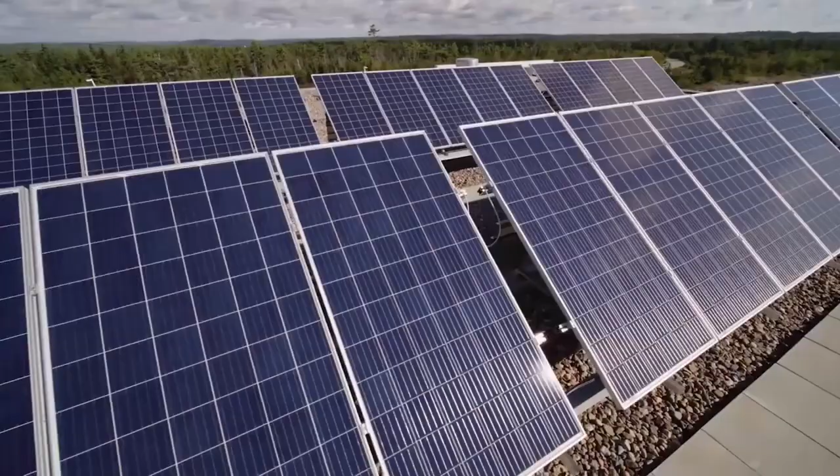We reduced emissions and energy use by minimizing air infiltration, providing better insulation values, and installing efficient heating systems with automated controls. The result is a sustainable and high-performing warehouse with a tight and well-insulated building envelope, innovative design features like vertical storing loading docks, low operating costs for our tenants, and zero carbon emissions in building operations.

We set out to build a new generation of zero-carbon warehouses, and that's exactly what we've done. An added benefit is the ability to offer our tenants the opportunity to have a zero central heating bill, which we think is pretty incredible.

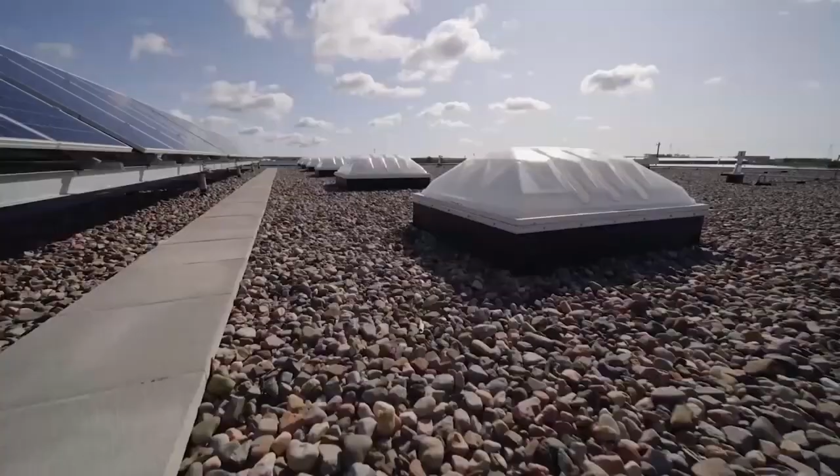With their commitment to pursuing zero carbon, Eastport Properties is paving the way for a new generation of zero-carbon warehousing, an asset class that represents over 2 billion square feet of real estate across 11 Canadian markets. The Zero Carbon Building Standard provides a path for both new and existing buildings to reach zero carbon. It's the only way we build for our future.